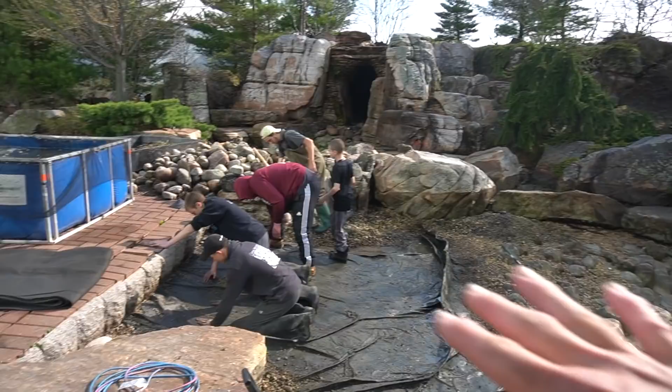I just came in from outside on our main pond, putting in a brand new sand beach on our big recreational pond at our office, as well as doing a clean out. So I was just involved in doing that. This is the pond that they built earlier this winter.

Now I'm going to come in and cut a hole in this thing right over here on this side, put a piece of tempered glass in there so we have a beautiful view. Let me show you what I'm going to do here. There we have a happy face. 7,500 gallons of water - if it fails, goes that way.

Retail store over on this side. This is where all of our guests are going to come in. Over on this side we have this beautiful koi pond. The fish have been moved temporarily. We pump the water from here into these holding tanks. We have aerators and everything in them. Some of the smaller fish have been relocated into this one. And then these tanks here are just holding the water.

We want to just store the water in here because this water has cycled. We went through the process. The fish have been in here for well over a month now. So all this water, the microorganisms, all that good stuff is growing inside of here. We want to protect that.

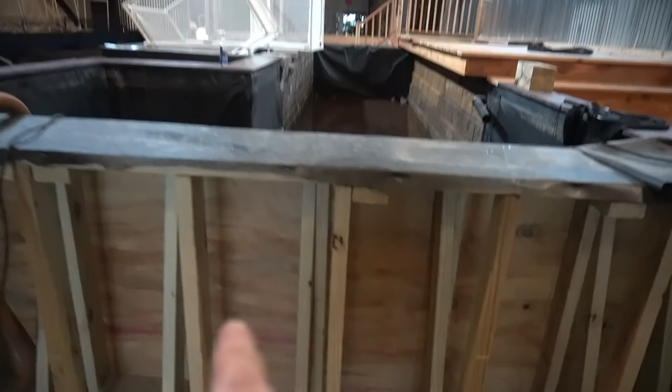So what we're doing right now is taking the last little bit of water out of here, draining this down all the way. What I'm going to do is come in here and cut a section of this wood out. I have some pieces of steel that I'm going to use to create basically a compression joint for the glass as well as the rubber liner. So what I need to do is reinforce this, because now I'm taking out a section of that structural component, so I have to beef all this stuff up.

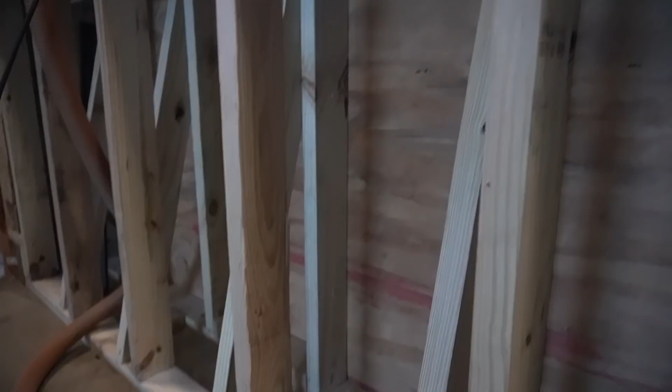So I have a series of 2x12s and things like that that are going to go inside of here as well as on the bottom. That'll kind of lock everything together to give us the necessary structure that we're looking for.

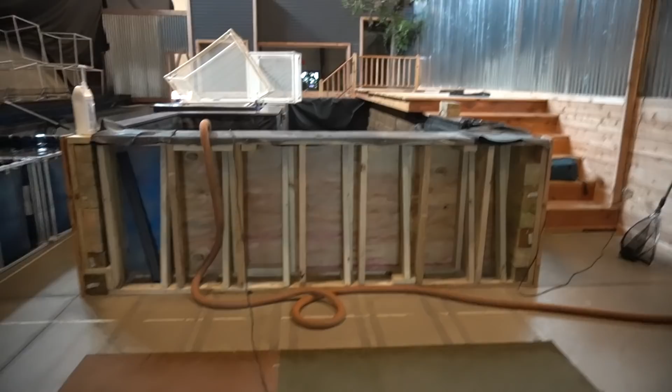Hopefully, if all goes smoothly here, I should have this done by tomorrow afternoon, just so we can get these fish back in here as quickly as possible, get them reacclimated. Everything's going to be looking good. So stay tuned for this fun little journey here as we start chopping, cutting, and splicing into that wood structure.

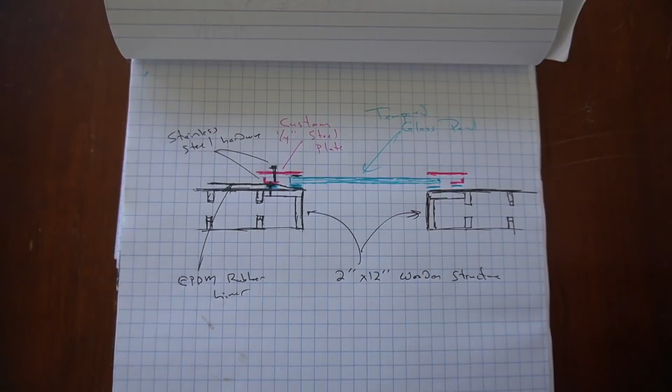I'm getting everything prepared. I always do sketches on everything that I do, and hopefully you get a little bit out of this. If you're interested in more drawings, I always do sketches on all my projects. I could show more of these if it makes things easier and more digestible.

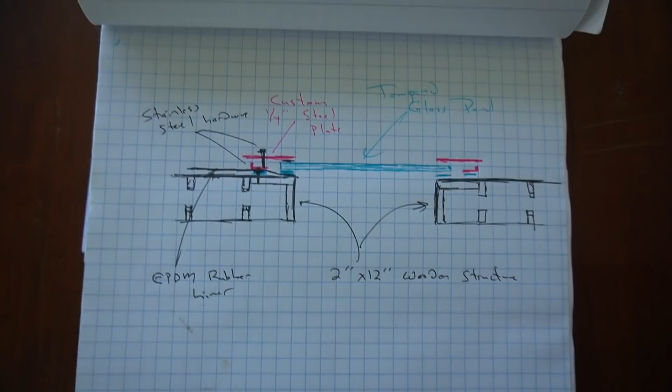This was the original wall structure, 2x4 construction, plywood bolted to the concrete floor. So what I'm doing is coming in and cutting a section of the wall out. As soon as I start doing that, it's going to change the overall structure. It's going to become a lot weaker.

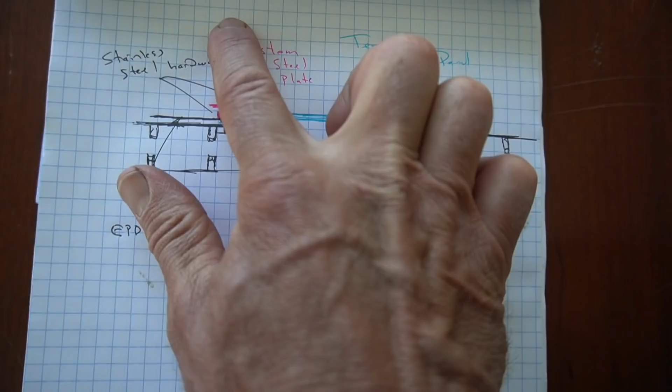You can see here I have 2x12 wooden pieces. That's going to give me a good solid mounting area. And if you've noticed the positioning, this is a top view, so the pond is on this side. So I'm going to have a lot of weight coming from here. So what happens is you have a twist. If you have a load going against something, it's going to want to push a wall over.

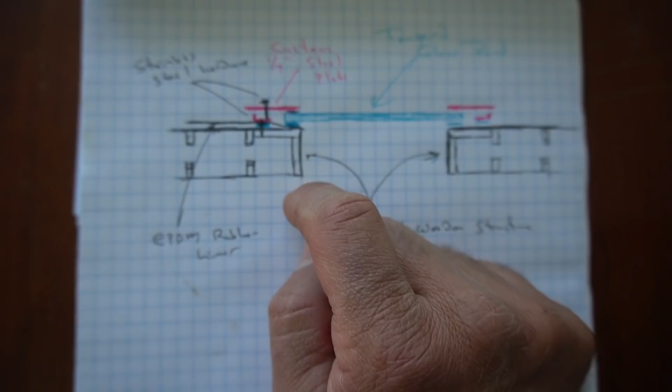So what I want to do is spread this weight out over a bigger area. It's going to transition the weight of all that pressure from this first piece into the second one, and it's going to try to rock it. And if those are bolted down properly, it should resist all of that stuff. So then once I have my frame taken care of, I'm going to get some steel plates made.

I'm going to have an angle iron on one end, then another steel plate on the other end. What I'm trying to do is create a compression joint. You can see I have my EPDM liner here, and the liner is going to go across. I'm going to have a couple penetrations that go with stainless steel hardware through the rubber liner.

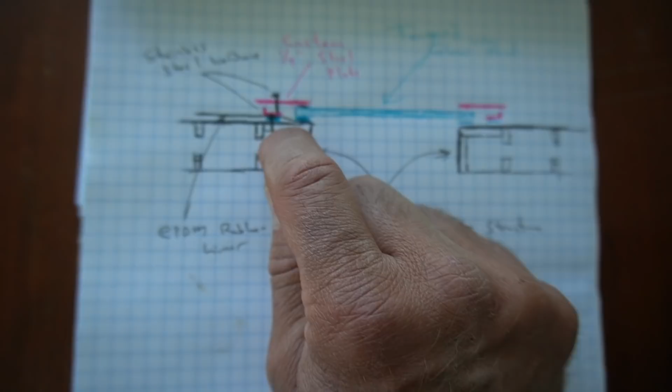That's going to have to get attached to that 2x12. That's going to become a weak point right there. So that little blue stuff on the drawing is actually showing a sealant, on the other side, just where the penetrations are at.

The other area where I'm going to have a huge potential for water loss is the connection between the rubber liner and the glass panel. I'm going to use just a regular silicone sealant in there.

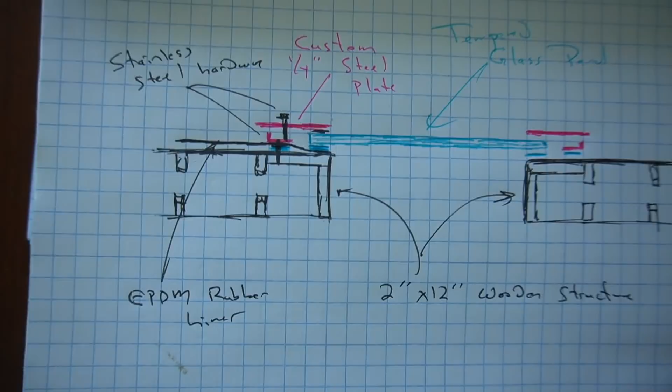So what happens is when I bolt this angle iron directly to the wooden structure, that's going to give me a hinge point. This metal plate is going to go across and bridge from this metal plate all the way to the glass.

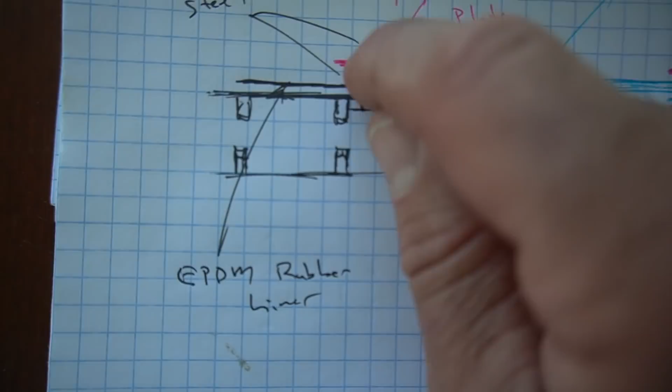So I'm going to have a steel stud coming out, and then I could put a nut on the end of it. When I do that, it's going to tighten that metal plate and draw it in really, really tight. When that occurs, I'm going to be putting pressure right here on this glass panel, and it's going to take that silicone, squish it, and push it all out.

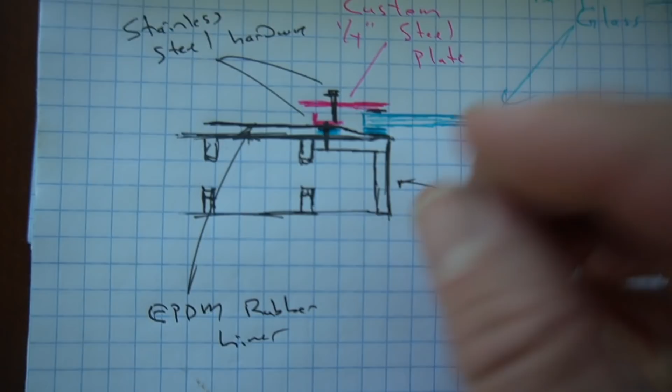If you do everything properly, have everything plumb, everything solid, all this should go together really, really simply. I'm going to go get all my wood, and then what we have to do is drain down that pond and we'll be ready to go.

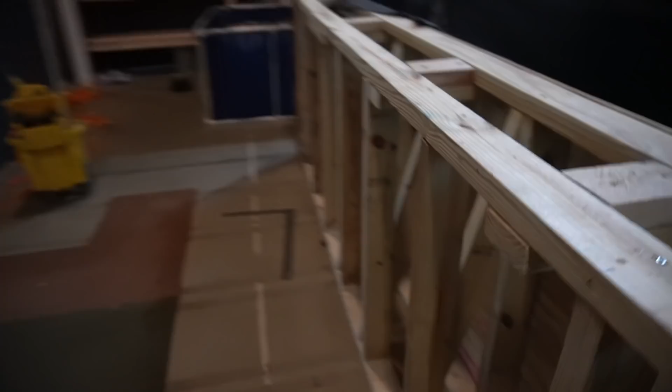All right, I just removed this cap board that was holding this edge of the liner down. This is going to allow me to pull all of this rubber lining in. You can see we drained all the water out. I start marking and cutting all of this stuff to accept a frame that I'm going to build to actually hold everything in place.

So you can see how they had this cross bracing and all that stuff in place, and that's just to keep that load transferred from the top plate all the way down to the bottom.

So what I'm going to start doing now is cutting and putting in a bottom plate down in here. I'm going to come in with a large 2x12, and that's going to connect these two individual pieces that are bolted down, but by tying them together, now they start to share the load between them. I need a good solid structure to work off of, so that's going to be a good base for me.

And then I'm going to come up with some more 2x12s over here on the side to create a connecting point against the plywood coming in from the other side, with my screws and everything to bolt the steel plates directly to everything. The liner obviously will be in between everything, but I need a good solid structure to work off of.

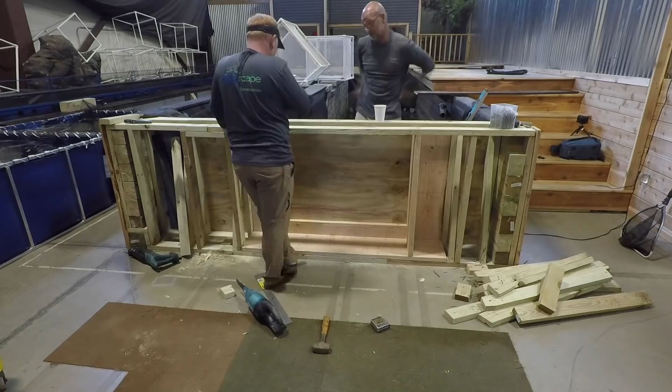So 2x12s are going in, creating that boxed out frame. This is going to be the bottom of the visible glass, so that'll all be cut out. The whole reason I'm going through this entire process of using 2x12 lumber, locking everything in place and trying to get that width, is to resist that force.

Water is super heavy, actually 8.345 pounds per gallon, and we have thousands and thousands of gallons of water in here. That push is going to be on this wall, and the force is going to be pushing that wall out. By having a wider wall, it's going to resist that force.

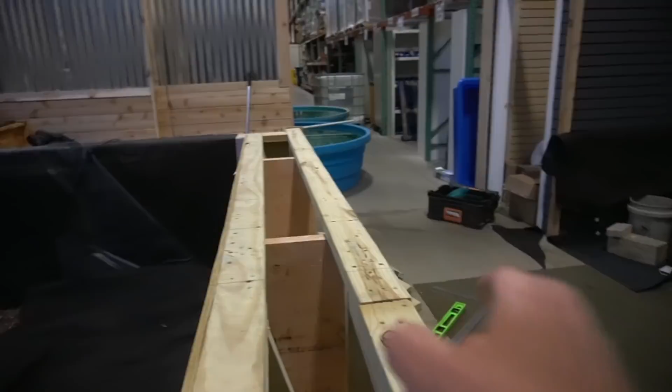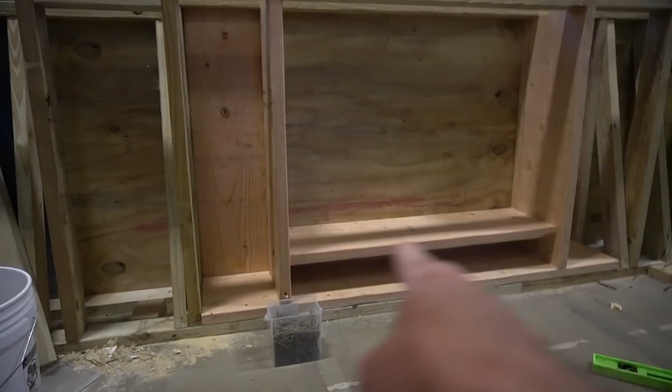So again, we want to resist that force pushing this entire wall out. By doing that, we lock everything in tight here, and we transfer that load down to the ground, which is connected to that plate, bolted into the concrete. So it's all about managing those different forces of what's going to be happening here. Next step, put another little ledge piece over here, finish boxing everything out, and then I can start cutting all the wood out.

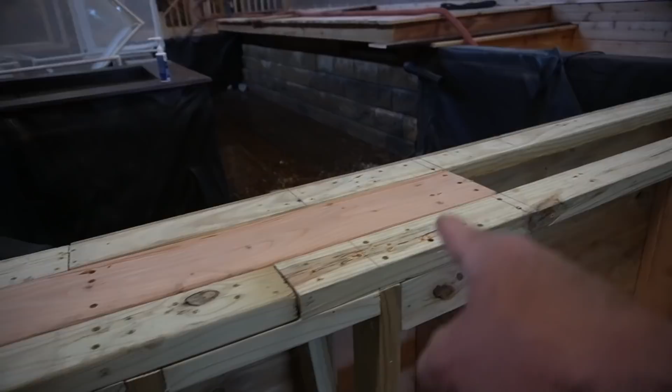The framing is complete. You can see I have all the 2x12s. I got some blocking in place to kind of lock everything up. I also put in some filler pieces up here on top, and this is just going to stiffen everything up, and it's going to connect the front wall to the back wall.

So my next step right now, I just marked the area right in here. I'm going to start cutting all this stuff out. This is all going to open up, and then I'll start to prepare the area for the glass.

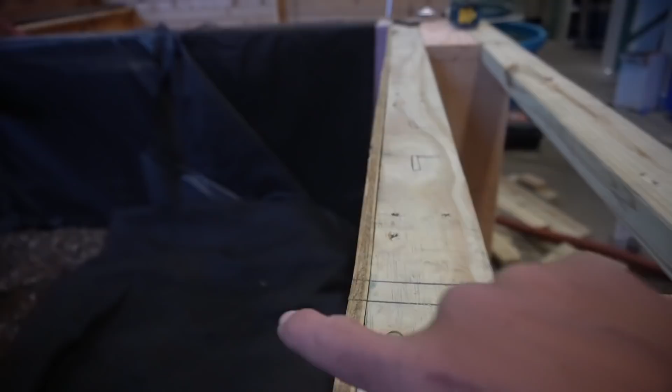One of the things that I have to do is there is going to be a piece of channel angle iron, 1.5 inches, that's going to go over this edge. It's going to help stiffen up the glass itself, but it's also going to help connect this wall to that side. That's one of my big concerns, is I want to make sure that these walls don't move independently of each other. Again, I'm not an expert in glass, so I want to make sure that I'm covering all of my bases here.

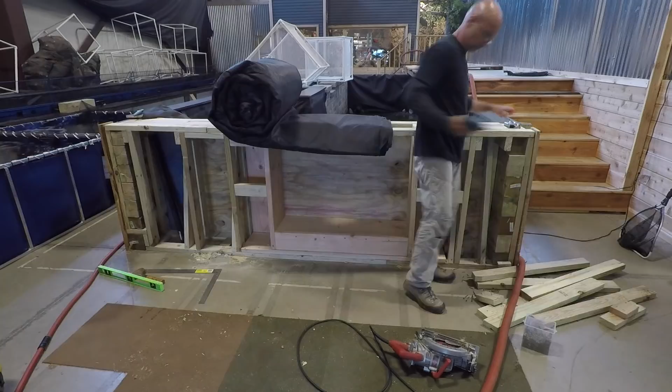All right, so here is my glass panel. I am positioning my steel plates. This is going to be the mounting hardware that's going to go on either side. It's going to put it under compression, push the glass up against the rubber liner, and then I'll have my silicone seal in between there. Here's the other brackets that are going to go in place. Just want to see how everything lays out here before I start bolting everything together inside of the tank.

Alright, so I laid out all my pieces over on the floor, leveled everything up, made sure that my dimensions were good. I then took those dimensions and marked them out on the outside of the steel channel, and then I set the steel in place using the top lag bolt just to make sure that everything was going to line up. Then I came in and marked the center of each of those holes all the way down.

What I'm doing is I'm going to pre-drill all these out, just going through the half-inch plywood. I'm not going all the way into the 2x material because I want that to really bite with the lag bolts. So I'll lay everything out, put a bead of silicone over all this stuff to seal it, and then put the liner in place, and I'll have to re-find these holes. I mark them up on the top so I know exactly where those are going to be, and then I'll start putting the screws in.

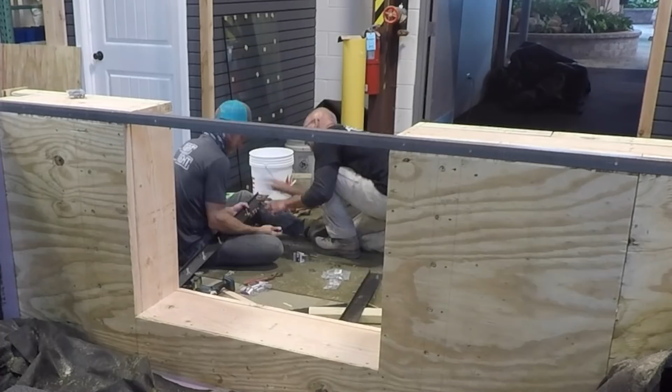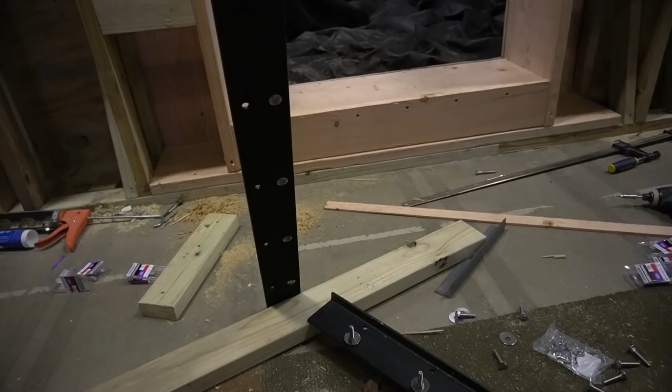These are all set. I have everything pre-drilled. We're gonna go mount these with the sealant between the liner and the plywood over on that side, and then we'll bolt everything in place.

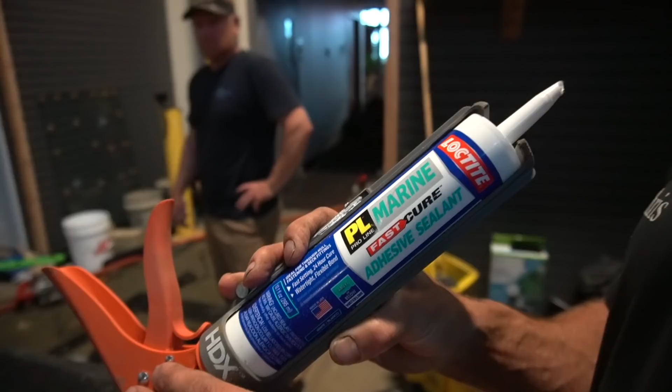We're gonna mount the glass with silicone. The stuff we're using is marine adhesive for the plywood liner, and then the other one is just gonna be silicone.

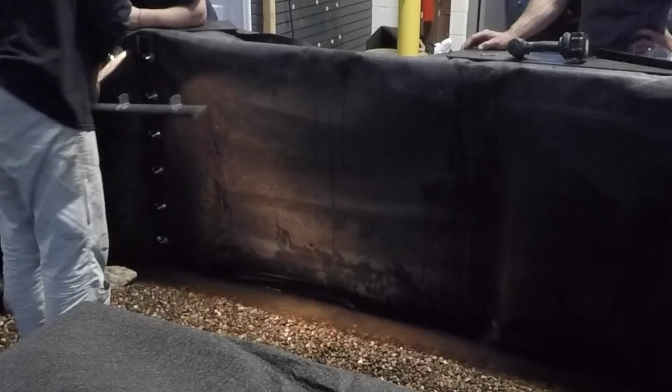All of the main angle iron brackets are in place. We have all of our little stainless steel studs coming out, and it's going to be time to do the silicone sealant and then the glass.

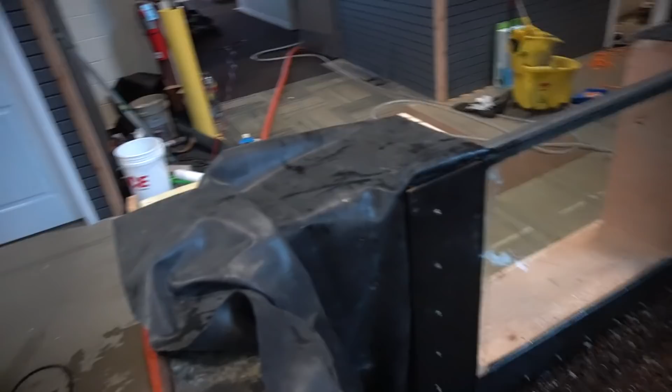So the gravel bed has been washed down. We're putting a little bit of seam tape on some of these corners. The reason we're doing seam tape, you can see what the guys did here before, is because we just have bare liner exposed. We don't want all the folds and stuff like that, so we're going to try to tuck it in so it's not as visible.

Water's going in. We have city water coming in over here, and this water is being pumped out of the other tanks that we use for storage. Remember, this is all aged water - it came out of the existing pond, so it has all that good nitrifying bacteria, which are important for the nitrification process.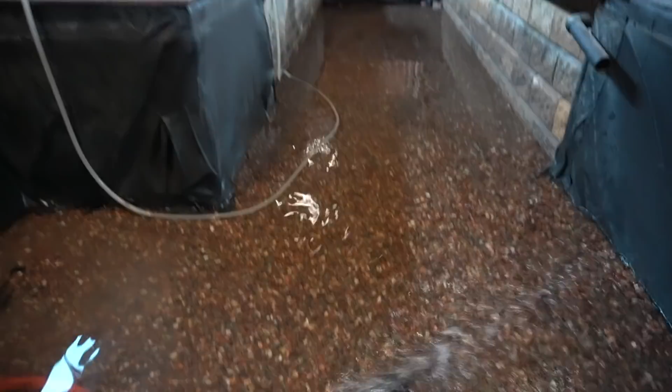Pumping that back in, and we are still using the pond detoxifier to neutralize ammonia, as well as take care of any of the chlorine and chloramines coming out of the city water.

Water's filling up, everything looks good. Checking all my connections - don't see any sign of water at this point, so that's a good sign. I do still have a lot of messy silicone down here, which kind of keeps freaking me out because it glistens like it's water. So far, so good. All right, now I just need another two feet of water in there.

Holding tanks are empty, pond is just about full. These tanks are drawn down halfway. So what we're going to do right now is catch the fish, put them back in that pond, and then we'll continue filling up the pond with water, and we should be all set.

Check it out, it's complete. Actually, my big head is in the way. There it is, looks awesome. Fish are swimming around, they're happy - this is all the big guys. Water's still really cloudy because we've been cleaning, stirring, and changing water out.

Looks phenomenal. I have been anxiously monitoring everything to make sure it's holding tight. I'm assuming at this point everything should be okay since I haven't had any problems. So, successful project - glad to see it coming to an end. Now the next steps are literally just doing the dress-up work on the outside, trimming things up. We can call this project done.